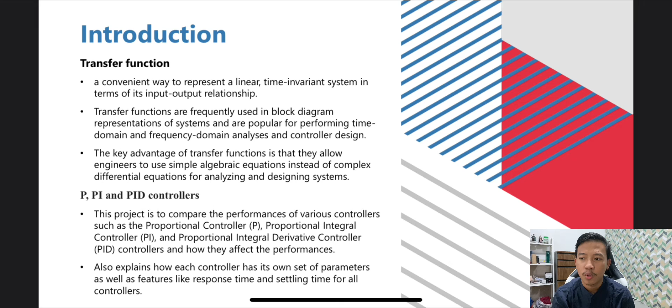Next, the introduction of P, PI and PID controllers. This project is to compare the performance of various controllers such as the proportional controller P, proportional integral controller PI, and proportional integral derivative controller PID, and how they affect the performance. It also explains how each controller has its own set of parameters as well as features like response time and settling time.

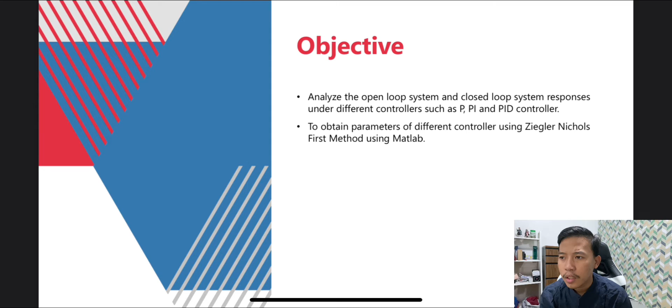Next, the objective of this assignment is to analyze the open loop and closed loop system response under different controllers such as P, PI and PID. The second one is to obtain the parameters of different controllers using the Ziegler-Nichols first method in MATLAB. For the method, loop tuning: tuning the control loop is setting the control parameters to their optimal values to obtain the desired control response.

For tuning, there are a few methods: manual tuning, Ziegler-Nichols tuning, and Cohen-Coon tuning. There are several differences between Ziegler-Nichols and Cohen-Coon. First, Ziegler-Nichols can be used for any system, but Cohen-Coon can only be used for first order systems. Ziegler-Nichols is more widely used, and Cohen-Coon is more flexible for first order systems. Ziegler-Nichols applies when the dead time is less than the time constant. Cohen-Coon can accept up to this value and it can be extended.

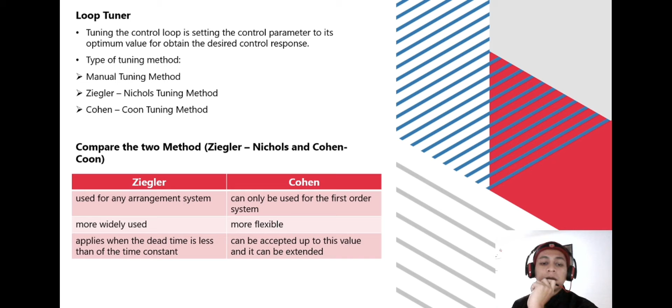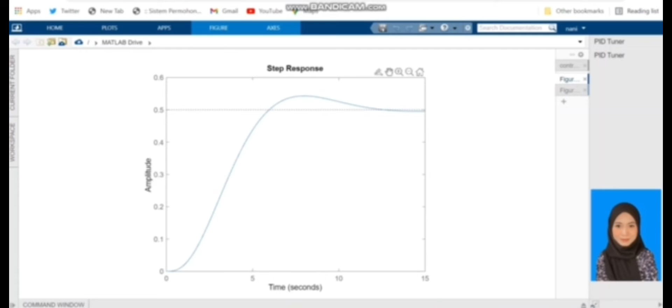For K, here is K, the average of the graph. For L, 0.41, from 0 to 0.5 of the amplitude, 0.4 is where the graph starts to increase. And for T, 5.99 is at time 5.99 here, when the graph is at the highest point. 5.99 seconds.

Then we can find A equals K times L over T, Ti is 2 times L over 2, and Td is L over 2. To find Kp, 1.2 over A, Ki is Kp over Ti, and Kd is Kp times Td. So this is the answer for K, L, and T. For Ti, 2 times L over 2 is 0.4100. For Td, L over 2 is 0.2050. For Ki, Kp over Ti, so Ki is 79.669.

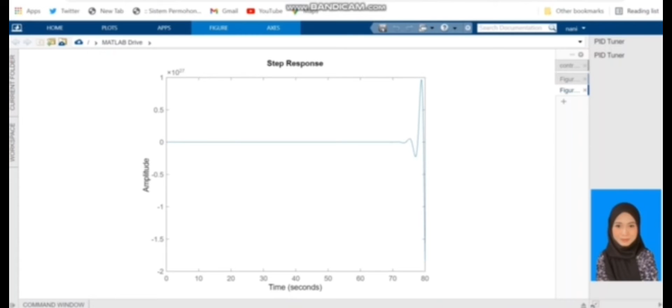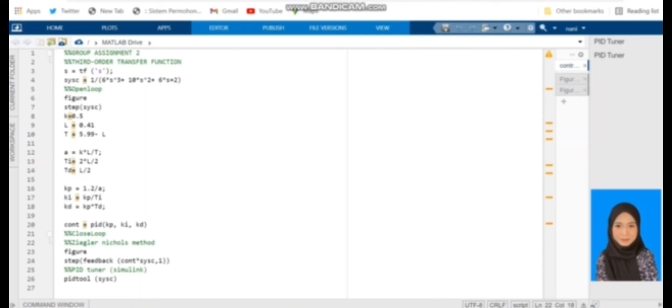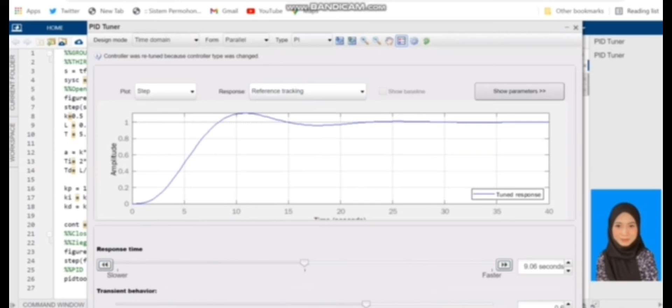So for the PID control system, Kp, Ki, and Kd for the closed loop, we use the Ziegler-Nichols method. This is the figure of the transfer function closed loop. From this, we can define PID with the PID Tuner in Simulink here. For P, this is the graph for the P tuner, this is the graph for PI, and the last one is the graph for PID.

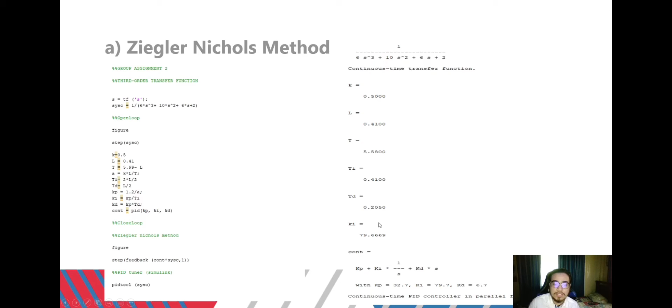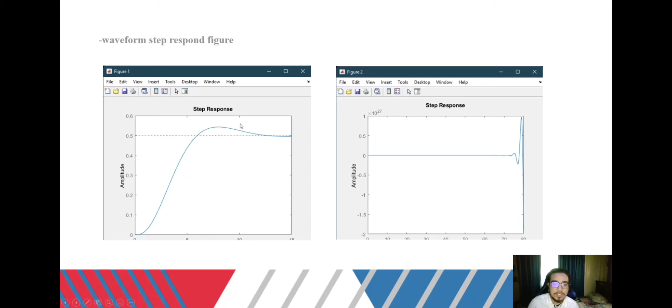When we run this coding, this appears in the result. This formula has Kp 32.7, Ki 79.7 and Kd 6.7. This is continuous-time PID control in parallel form. When we run that, this waveform appears. This is the step response figure we got when running the coding in MATLAB. So the PID Tuner closed loop. This is the closed loop step response for P. We just press this type to change between P, PI, and PID.

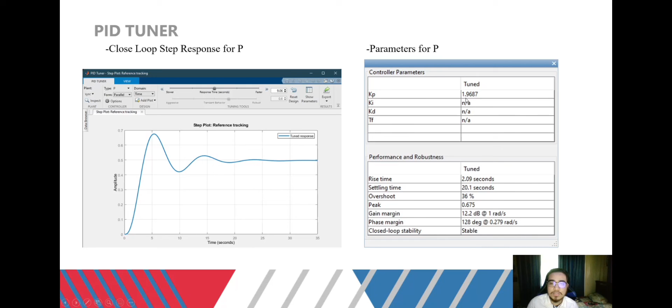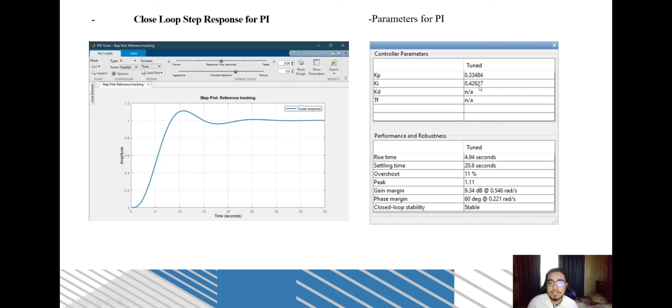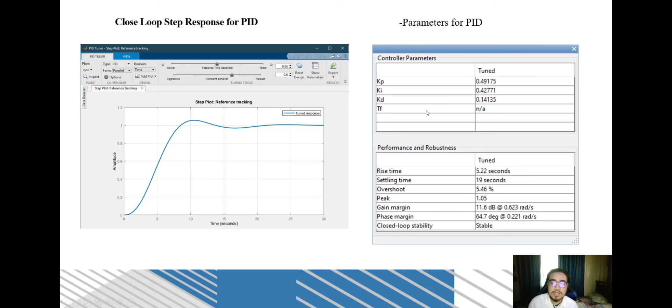For the P parameter, we just got the tuned Kp, and the value is 1.9687. For the closed loop step response for PI, we got just Kp and Ki. The tuned value is 0.3348, and for Ki, 0.42827. Kd and Tf are unknown. For the closed loop step response for PID, the parameters we got are Kp 0.49175, Ki 0.42771, and Kd 0.14135. Tf for PID is unknown. And this is all from me.